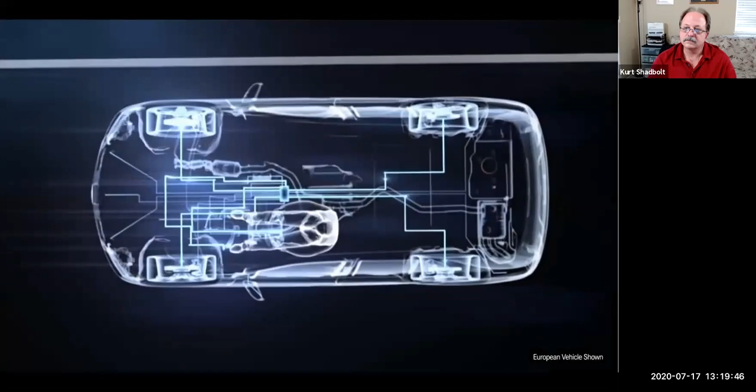During the first few minutes of driving, Attention Assist draws up an individual profile of the driver's driving style, which is then constantly compared with the latest feedback from the sensors. At the heart of the system is a highly sensitive sensor that records steering movements and steering speed.

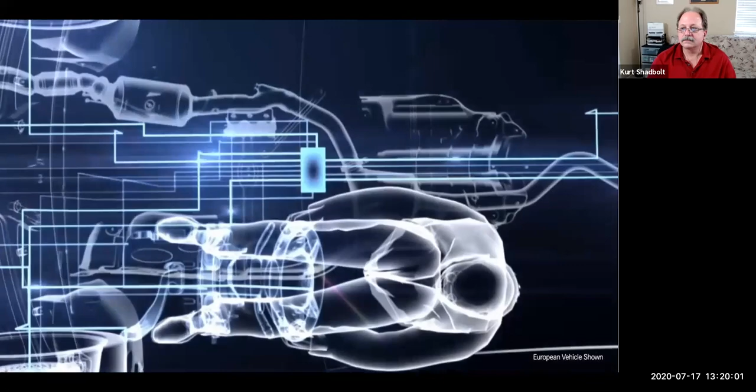Studies by Mercedes-Benz have revealed that drivers who are tired will keep making minor steering errors, which they then usually correct immediately. If the system detects this sort of behavior, it will go on to check further relevant parameters in order to verify the result.

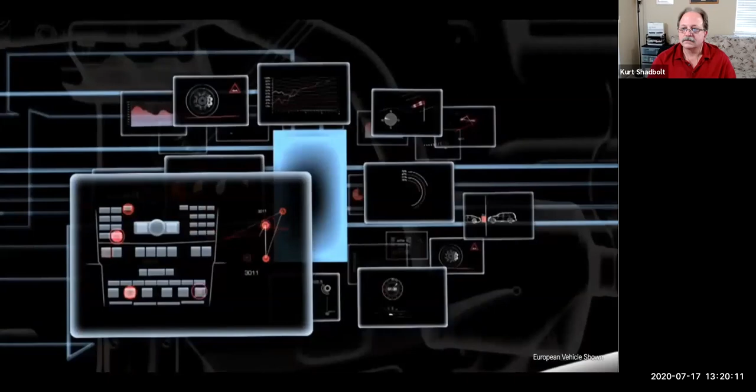For example, how long has the driver been at the wheel? Is the driver using the instruments and thus showing signs of activity? Are there external influences at work, such as side wind or an uneven road surface?

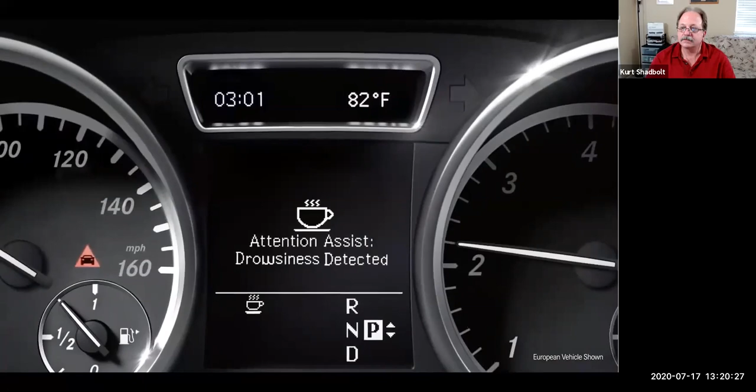If the result is unequivocal, Attention Assist will issue the audible and visible prompt, 'Time for a break.' Attention Assist from Mercedes-Benz helps prevent accidents caused by driver fatigue.

So that one's algorithm based, it's not using a camera. This next one's using a camera, and then we'll go into some questions that come up.

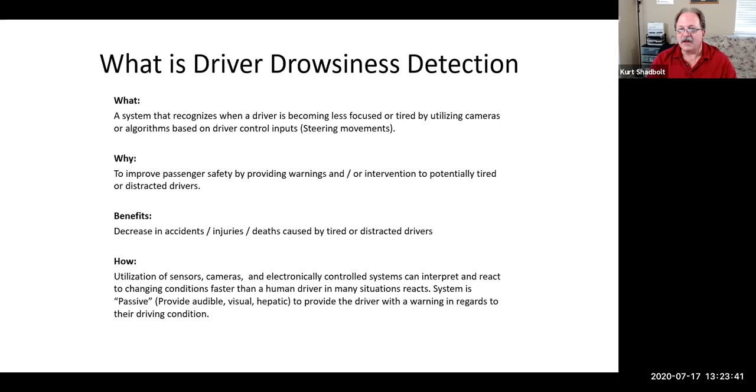And if you've got this system along with things like lane departure, the system becomes a little bit of an active system at that point, because now lane departure is going to kick in as you start to drift around. Or if you've got lane centering, it's going to help keep the vehicle straightened out a little bit. So there's some interesting aspects to this that have a lot of overlap with other systems.

So again, we're using a camera or algorithms. And one of the things that I thought of with the algorithm one, because it's very much looking at speed or at steering sensor input, so steering angle sensor is going to be a huge input with this.

What if you've got a shaky hand driver? Somebody that's got that vibration in their hands all the time, it's going to be looking at that static input all the time. Well, theoretically, if it's creating a template for those first few minutes when you're driving, thinking that you're more awake, it would see that normal input variation. And it's when you get tired that it would see an abnormal input variation.

These systems, when they first came out, they were notorious for the coffee cup instrumentation and identification. Hey, get a cup of coffee, pull over, relax, things like that. Typically it was an audible, not so much a haptic, but it could be.

But one of the things I started to wonder is, what if my driver's wearing sunglasses and it's a camera-based system? How is it going to function? What if they just wear regular clear glasses? Because we all know, and you can see it on my face right now, because of the way the lights hit the lenses, the way the computer screen hits the lenses, the reflection - so how closely is it looking at my eyes for blink rate and things like that?

What if I'm one of those drivers that you see that have the big green sun shield in front of their face?

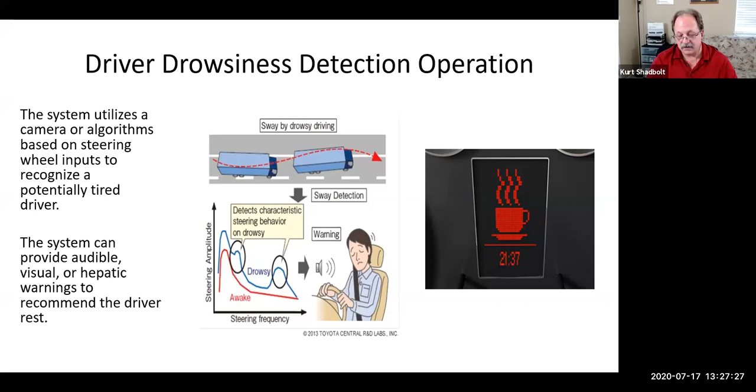Components in this thing, it can be a camera or it could be just module algorithm based. We're going to be looking at steering angle sensors primarily, but you may also have input from lateral accelerometers so that it can pick up gust and wind. The system could be looking at wheel speed sensors for variations if you were winding and driving through the road.

The cameras and stuff, a bunch of us went to San Jose about a year and a half ago, and went down to that technology center for a tour. And there was one of the companies that was there, and their whole focus was on facial imaging. And it was being used in automotive applications and airport security and all these different things. And they were using it for picking out threat potential things. Are you happy? Are you mad? Are you sad? Whatever. And it could pick those things up.

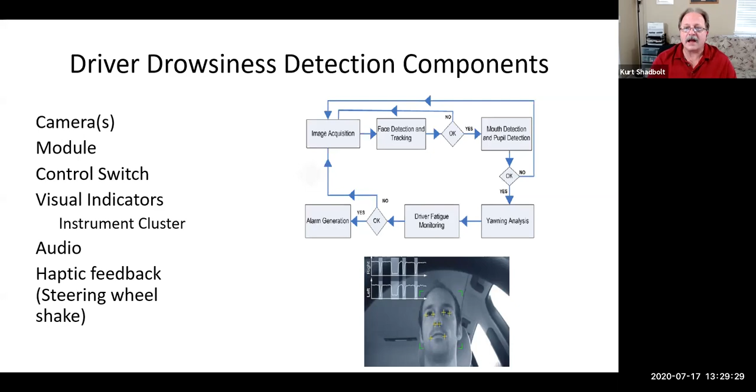Now, diagnosis, if it's a camera-based one, we've got to look for damage to the camera, and we might also take a look at customer-caused problems. Some people store their mail on the instrument cluster. I've got a guy around the street from me. His car, other than the driver's seat, is level to the glass. Back seat, front seat, dashboard. That's not going to work. Now the technician, what are you going to do? You're going to get in there.

You're going to take all that out, you're going to drive the car, and it's going to work fine. What's the customer going to do? They're going to stuff it all back in there. So you need to educate them on, hey, you got to leave that out of there.

Fault code chasing, our powers or grounds or signals. I got a diagram that's going to come up in one of these other ones to where it really reinforces exactly what I've been saying with those three things. Understanding, that's the biggest term I want to use today. The more they understand, the faster it will be, the better they'll be able to diagnose, and they'll also be able to make that decision of it's not broken, it's you, and re-educate the customer.

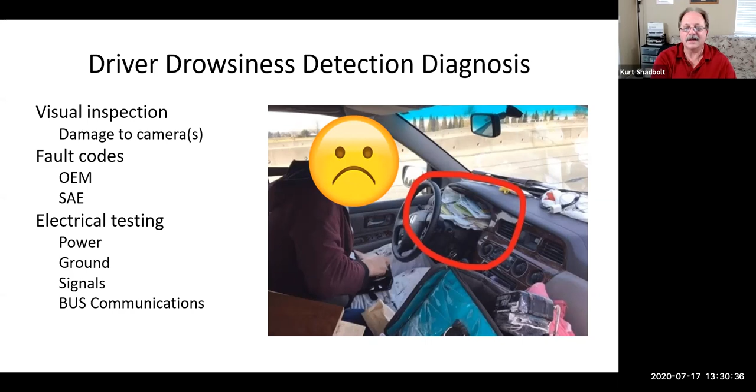You can see this is one of those camera-based installation locations. If you had a driver who drives with their hands at 12 o'clock, they're going to obscure that camera. These kind of things come into play. If you have customers, I think on that Subaru, because it looks like it's coming out from the navigation screen, maybe they put a phone holding clip in the vents near it, and now their phone's in the way. Or they got a bunch of stuff hanging down from the rear view mirror and it swings in front of it, their work badge, stuff like that. All of those different kinds of things could be an issue when it comes to diagnosis.

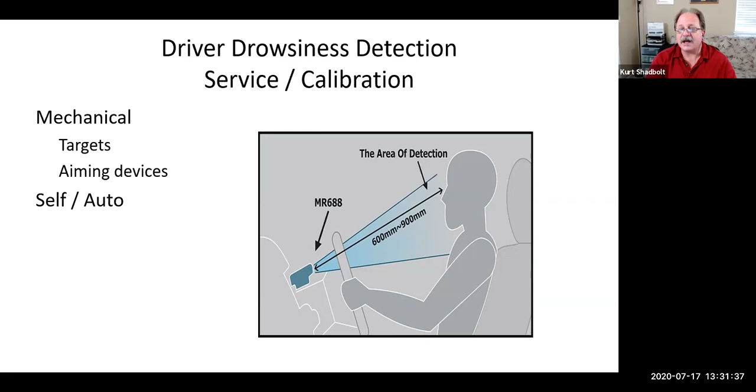The good thing is there's really not going to be a lot of calibration. The camera mount setups that I've seen, it's pretty much a fixed thing. It's mounted, there's no adjustability to it. I don't know on the Subaru if there's any capability within that, but it's possible. Otherwise, there's nothing special you got to do. It's kind of a use it and go type of system.

So let's see what we've got in here. This one's kind of a straightforward topic. Steve K says the system will monitor uneven road surfaces, then it'll monitor ride height to determine an uneven road. What it's looking at is a lot of different things. It's not so much looking at uneven road or ride heights and things like that. It's really looking at what are your normal inputs.

So when you first start driving, it assumes that you're awake and alert. And your steering inputs, typically when you're awake and alert, are going to be less. But if you're on a rough road or in a windy condition to where you're having to make corrections, your corrections are probably going to be kind of smooth and as necessary. But as you doze, you stop having those little corrections and they become jerk reactions, as you start to go, oh crap, and it becomes a different response rate. I'll use the term frequency. Your frequency changes based on the road conditions and atmospheric conditions.

Mike mentioned, does Subaru say you can't wear sunglasses in the owner's manual? I haven't looked, but I wouldn't be surprised if they did say the system may not work properly or correctly if you're wearing glasses and things like that. I know there's a couple schools that have Subaru in their program, so if you've got that and you're aware, throw it in there. But it's something I thought about this morning and just didn't get around to looking at.

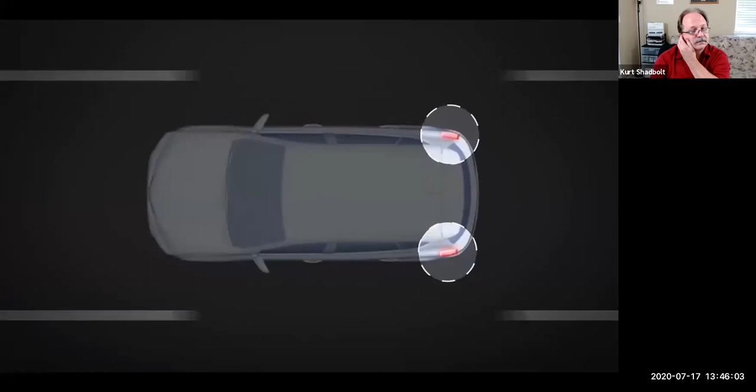The Rear Cross Traffic Alert function, or RCTA, available on select Toyota vehicles, warns drivers of oncoming cross traffic, helping them avoid unexpected collisions when backing up. RCTA is part of a safety system that also includes the blind spot monitor, both of which use the same radar sensors located inside the left and right sides of the rear bumper to detect vehicles within the monitored areas.

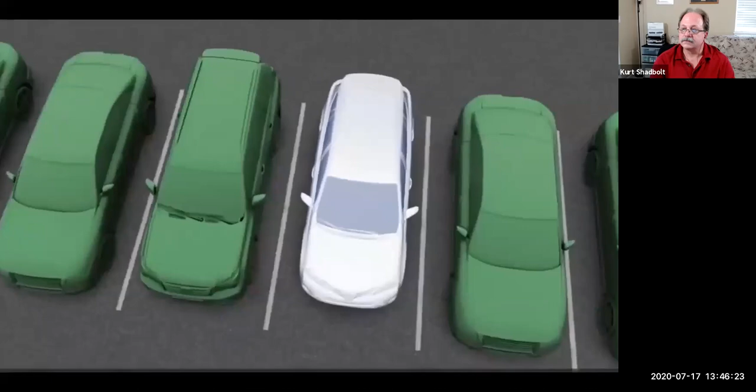Both features can be turned on or off using a common switch labeled BSM on the instrument panel. When turned on, the rear cross traffic alert function is operational when the vehicle is in reverse with a speed of less than approximately 8 kilometers per hour and a vehicle larger than a 125cc motorbike is approaching within the monitored area at a speed between approximately 8 and 28 kilometers per hour.

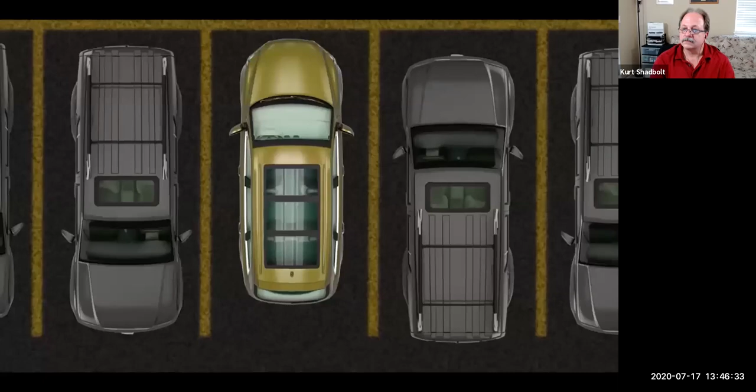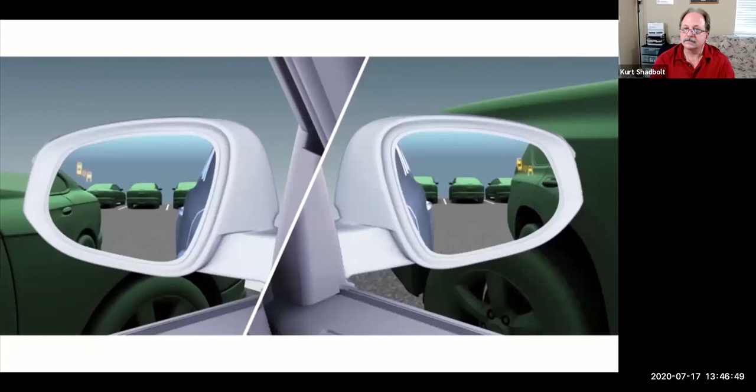The rear cross traffic alert function detects vehicles approaching laterally from the right rear or left rear of the vehicle and advises the driver accordingly if it judges that another vehicle may intersect with its own path. It does so by flashing the outside rear view mirror blind spot monitor indicator lights and simultaneously sounding a buzzer mounted in the rear cabin space. To give the driver more time to react, the buzzer can alert for faster moving vehicles from farther away.

The rear cross traffic alert function will not react to vehicles or objects that are stationary within the approach zone or to vehicles that are moving away. For the rear cross traffic alert function to operate normally, the sensors in the rear bumper must be kept clean and clear of any obstructions at all times.

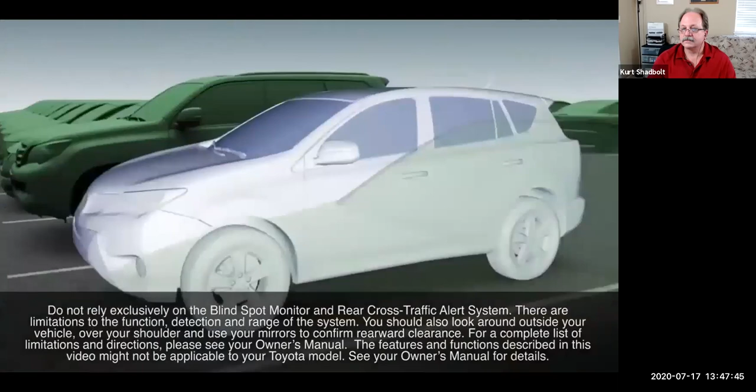The rear cross traffic alert function is only an assist and is not a replacement for careful driving. In some conditions, which include inclement weather, the size of the adjacent vehicle, and the speed at which that vehicle is approaching, the system may not function correctly. Therefore, the driver is solely responsible for safe driving at all times. The features and functions described in this video might not be applicable to your Toyota model. See your owner's manual for details. Thank you for watching this Know Your Toyota video.

Now, I don't know about you, but now that everything seems to be a truck, an SUV, a crossover, I drive a car a lot of the time, and I can't see when I back out of a parking space. So to me, this system is the greatest thing since sliced bread. I don't have it on any of my cars, but it has a huge purpose, you know, for that parking space, but also people's driveways and stuff.

So what sensors are we using? We're using those same radar sensors that we've used for blind spot detection. Those same radar sensors, and that's the big thing. And we've been kind of talking about this.

We can utilize these things for multiple aspects. We're paying attention to this when we put the car in reverse. Those sensors go active, you back up, it picks up, and then as soon as you drop it back into drive, those sensors go into standby, basically passive at that point until you have sufficient speed where now they're active for blind spot monitoring. So that same thing, just a different line of code.

Big benefit, accidents. How many times have you seen people racing through a parking lot and crash into a car backing out because the car backing out couldn't see them because they came flying up? More importantly, like you see on the TV commercials, the guy's backing out of his driveway and the little kid comes up on a little scooter or something like that. These things will directly impact accidents and injuries.

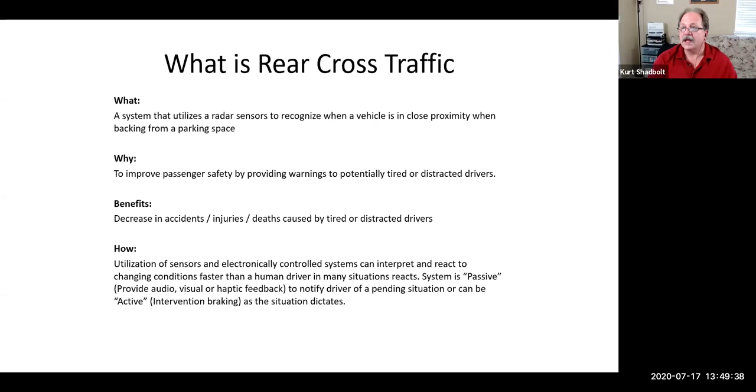So operation, it's those rear-facing radars. It's going to pick up moving objects within a certain size, space, window, and give an alert or possibly interaction if it's got an active capability.

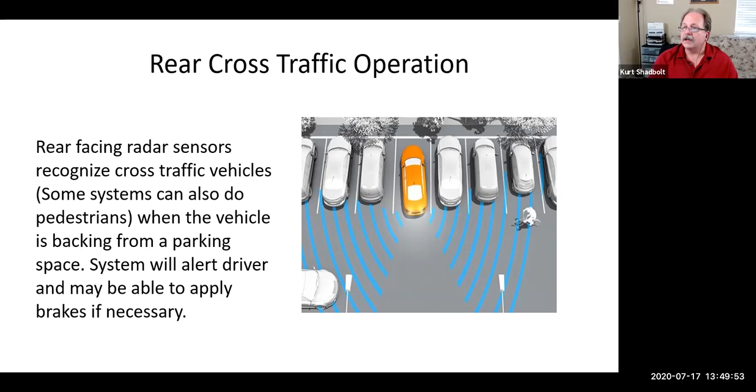Rear cross traffic components, the radar sensors—and where are they located? Well, it varies on cars, but a lot of the time they're on those rear quarter panels, say under the tail light or just to the front of them or just below them. They're right in that area where a corner collision, they're exposed.

And they are mounted—you can see on that picture, they're mounted to a bracket. Well, if this car has been in a collision and they don't get that rear body structure essentially perfect, even if they put a brand new bracket on there, it could be off millimeters or degrees, and that radar is no longer going to be viewing in the area it needs to view.

What if they had a bunch of body filler on that bumper cover? Instead of replacing it, they just filled it. Or they used an aftermarket cover that was thicker. All these kinds of things come into play because anything that obstructs that signal from penetrating that cover is like putting earmuffs on it. If it can't get its reflection correctly, it's not going to work correctly.

It may not have to stop it completely, because that would bounce it back and give me a fault code. But if it slowed it down enough, I might not get as quick a reaction as I could or should. And if we're a system that's an active system, hey, now we're talking with the brakes, so the ABS can apply, because even if your foot's not on it, I run those pumps, I run the solenoids, I got brakes. Again, just using things we've already got.

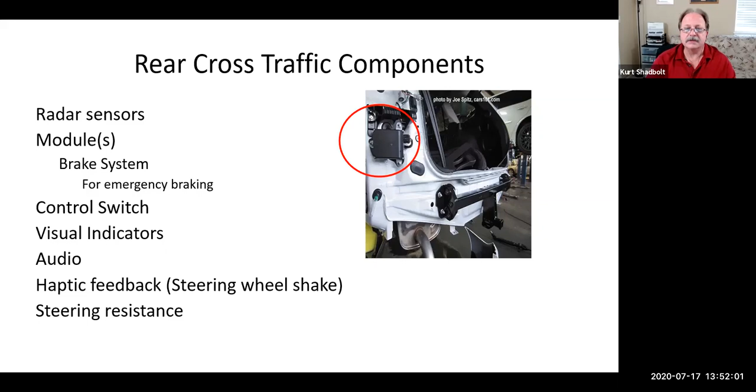Diagnosis—everything that we've been talking about, it starts with the visual. It really, truly starts with the visual. If there's signs of damage, if there's signs of previous repairs, looking into vehicle histories, all of that kind of stuff, you've got to dig into that because that could be the cause of the problem. Now, don't write it off and say that it is, because it might not be.

But then going through, looking at the fault codes—is there modifications? Because again, it's a radar sensor, it's got an expanding cone that's leaving it. If I lift the car, if I lower the car, that's going to change what it sees.

If I've got modifications back there, maybe bicycles on a bike rack on the back of my Subaru have the wheels hanging off, and the wheels interfere with that radar signal, it may be giving some false positives back. So there's a lot of things that could come into play that could give false positives or put the system into an off mode because it's seeing returns that it shouldn't be seeing based on an obstruction.

If I was looking at it, maybe the customer complaint is related to rear cross traffic, but I might have fault codes for blind spot detection, because those same systems are essentially using the same sensors. I might have a fault in one because of the nature of how that system monitors versus the other. So I might have a rear cross traffic complaint, but I'm diagnosing it through a test plan based around blind spot detection, since they're the same sensors.

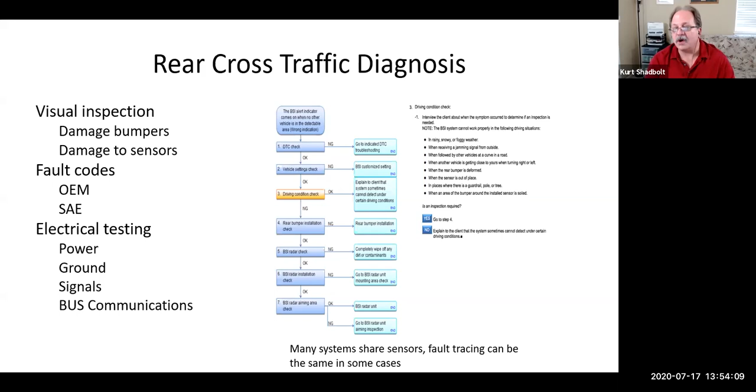And again, weather conditions all come into play. Is it covered with snow and ice? All those kinds of things. Is it a weird parking place where it's got a dip and a bump, those kind of weird spots you might get into? Those things could have an impact, so back to having a general awareness of what's going on with it.

Because it's a radar, it's got to be calibrated, so you're going to go through those calibration steps with the radar sensors. Thinking back to Josh in one of the earlier videos, I believe they were doing one of the rears. Essentially there's a target in a certain location that provides that radar a certain amount of bounce back, and as long as the system gets the bounce back it should, with everything located where it's supposed to be, the system's happy and it's calibrated.

Driving and self-auto calibrations might not be as plentiful with this, because you might not be in the right conditions for it to learn. But as we've discussed, a lot of newer systems have gone full circle - from mechanical to more automated, and now a lot of them are circling back to mechanical, because it's so difficult to get the vehicle in the right conditions during a road test to calibrate, that they've defaulted back to putting a target on it so they can be sure it calibrates correctly.

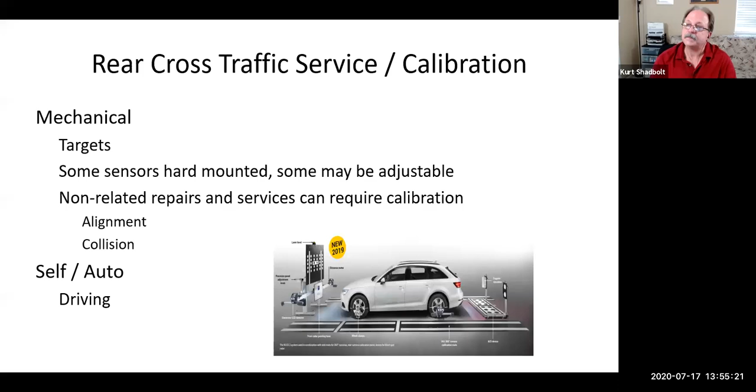And again, that was a pretty easy system. So let's see where we got here. Let's see here, scrolling my way back up.

Steve K saw a Chevy ad that will fill in the picture when a trailer is attached to the truck when in reverse mode. Any idea how that system works? Will it fill in the picture of the object closest to it? Actually, I do know how it works.

There's another camera - there's an accessory kit you buy, and you mount another camera at the back of your trailer. That hardwires in through the switch, the plug connectors, and it has to be a GM connector. You've got to activate the system in the programming and everything, and essentially it superimposes the camera picture from the back of the trailer instead of the camera picture from the back of the truck. That's also a key thing to keep in mind with a lot of these systems - if you've installed a factory trailer or trailer hitch assembly with factory wiring, that's the big piece: going through and getting the factory connection assembly and doing the programming. Because that's when it knows you plugged in a trailer, versus ignoring the rear park distance control.

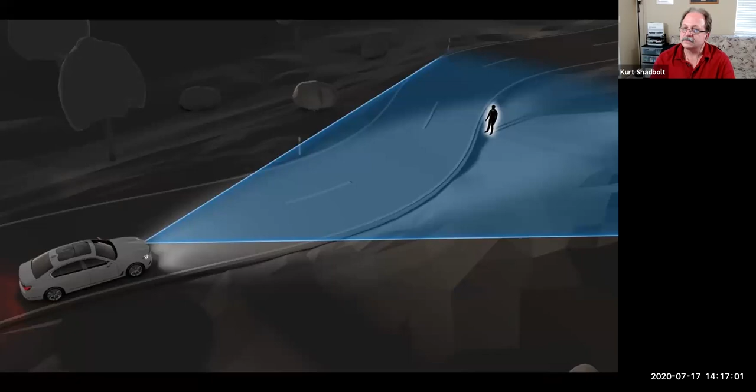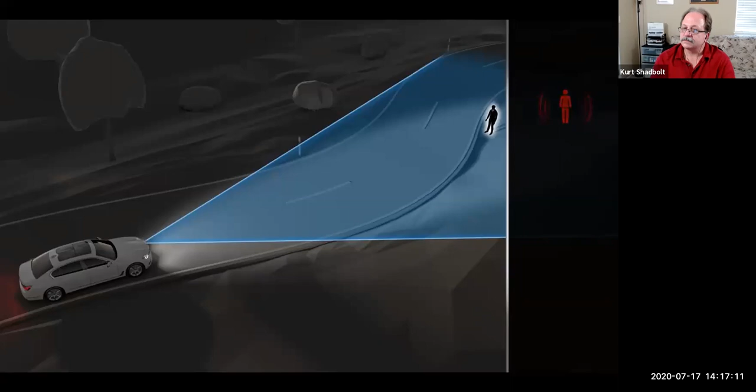The night vision system, providing human and animal recognition, warns against people or animals at night. To do this, a thermographic camera scans an area in front of the vehicle. People or animals from a certain size are correspondingly recognized by the system. As soon as a person or animal appears in the warning range, a warning is signaled. In case of an increased danger of collision, there is an acute warning with a warning signal. Additionally, a thermal image can be displayed in the control display.

So that's just a very quick one. I just saw Robin had chimed in. Robin probably has some collision background. He said, if you spray a steel coupon, a steel template piece, and maintain the same viscosity of paint on plastics using the same technique, you can establish a proper film build by measuring the coats on the coupon with the electronic thickness gauge. So that's a way where if I was measuring a plastic bumper, I could compare it with the metal on the car, if I'm a body shop really concerned about making sure I have the right thicknesses on there. So that's a good answer.

Thank you. So night vision - one of the big challenges we have is we're human and we don't see that great at night. And no matter how good our headlights are, whether lasers, LEDs, or xenon, the National Highway Traffic Safety Administration still says our headlights suck in most cases. So we can only see so far. Night vision is one of those things that takes that distance and almost doubles it quickly. It really creates a completely different environment. That's why I mentioned from an autonomous vehicle standpoint, night vision covers a gap that we have in systems.

Okay, and we can look at - who was it, wasn't Waymo, I can't remember which company it was that had that van about two years ago in Arizona that actually impacted a person crossing the street in the dark at night. The radar should have picked them up, but cameras don't see that great at night, they don't amplify light that well at night. And remember, the driver was looking down at their phone, not paying attention, though the driver might not have seen them either. It was a pitch black area and the person came out suddenly from the side. Night vision would have seen them hundreds of yards before that.

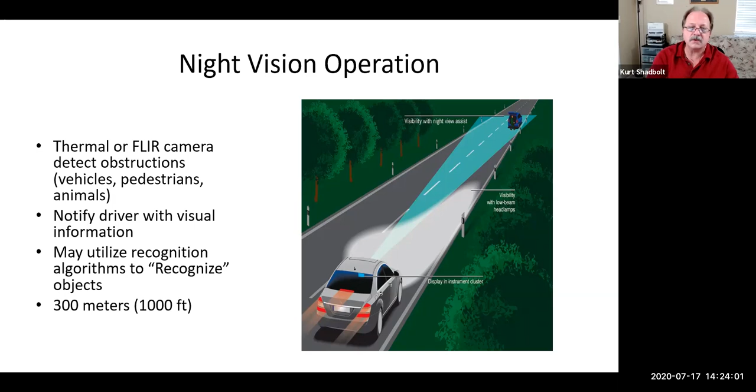Cars use thermal. The main component is a camera. It tends to be mounted in the center of the grille on a lot of these vehicles, fairly high up so it can see well. Again, they're not very large—the lens might be about 1 inch round, probably closer to 3/4 inch. The little box it's connected to is like a couple feet away, Zippo lighter sized, maybe a couple inches by an inch, and that's the box the camera is mounted to.

In most cases that camera is the module, similar to radar sensors and things like that—they're a module in itself. The diagram I'm going to show you in a second really drives that home.

Night vision is usually something you have to turn on. It's going to have some sort of display screen, whether in the center of the dash, displaying through the nav indication, or some manufacturers putting a third screen in the middle of the instrument cluster. You can see from the picture there, not only is it giving us the thermal image, but it's also superimposing a little red box around that person to draw more attention for the driver.

And when we were talking about adaptive lights earlier, we saw that one system that would spotlight. Well, that spotlight system was tied into the night vision—the night vision would pick up the person and connect with that spotlight system to highlight them with the spotlight.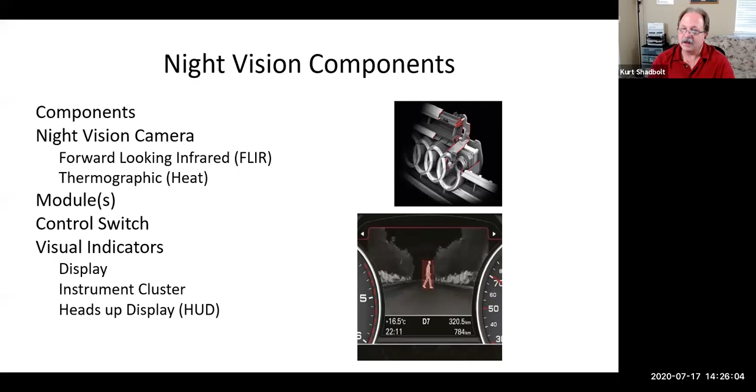So my electrical testing: do I have power to the module? Do I have ground to the module? And do I have my CAN bus communication? If I've got all that electrically, I'm good. Could I still have a hardware problem with the module or the camera? Yes. Could I have a software problem inside of it? Yes, but those usually are not a programmable module. So if it's bad internally, software or hardware, it's a new part.

There's your diagnosis. Now its results, the sensing it's making, it's transmitting that information over CAN. And it's going to whoever that system is directing it to, whether it's an instrument cluster or a master module that's controlling all the ADAS stuff, or maybe it's going straight to the display.

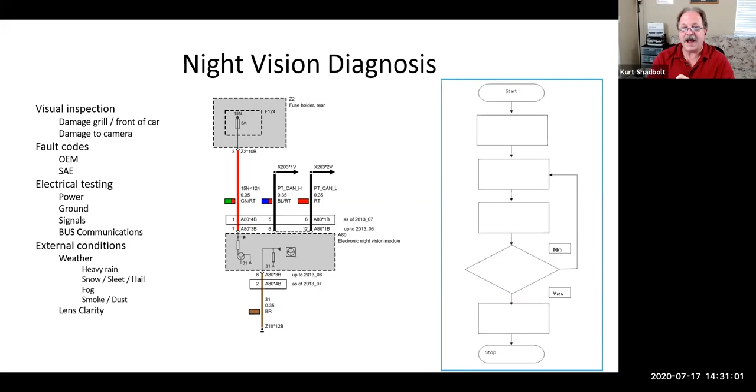If I've got really heavy rain, is night vision going to be seriously impacted? Not so much, because if that deer's out there, it's a lot warmer than the background. Same thing with sleet, snow, hail, fog, smoke, dust, everything else — it's a thermal image that I'm looking at. The challenge could be the clarity. It may be a little foggier between me and them if it's all impacted and built up with ice, but I'm still going to see a heat signature there that I wouldn't see with anything else. So it's a pretty robust system, but they are expensive. Everything I've seen option-wise, it's like a $5,000 or $6,000 option just to add night vision in a lot of cars.

Calibration on this is pretty straightforward. There are some ADAS calibration units that have a targeting setup for it. But with some of them, it's literally that headlight aimer like I showed last week — that's how you're setting up the camera, more with a headlight aimer. It's not so much about reflective targets or anything like that. It's kind of a spot point A target type of thing.

People are curious about sensitivities. Right now we're on about the 3rd or 4th generation of night vision. When we first saw night vision, back in 2002, 2003, we had a car parked in a stall with a power supply on it. We were teaching night vision.

You put a cup of boiling hot water in front of it, lukewarm and cold water, and wave your hand, and everybody goes ooh, ah. We saw this little lighted line that literally went right down the middle of the screen. We couldn't figure out what it was. Then all of a sudden somebody was at the front of the car and it went away. We're like, whoa, what did you do? All they did was turn off the power supply. What we were seeing was the temperature difference between the power cord for the power supply and the drywall it was laying in front of — it gave us that faint line. This was 2002, 2003. That's how sensitive these systems are.

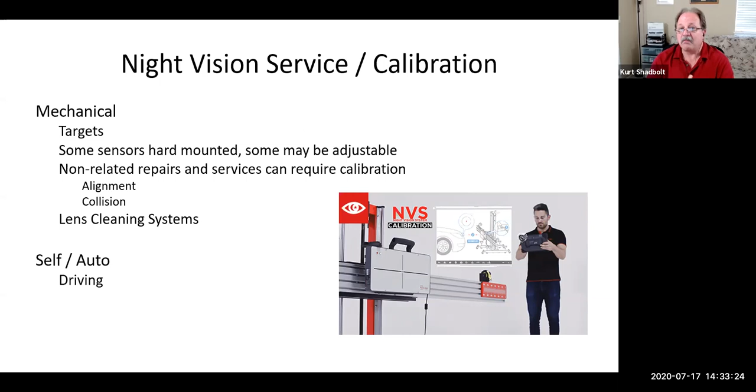In some of them you can replace lenses; oftentimes you're replacing the assembly. You might need to go through and carefully clean the lens. It does have a face surface that's very similar looking to an ultrasonic sensor — not that fisheye glass sensor lens, more of a muted, matte colored lens. So it's a little different. But for the most part, you're calibrating it like you do a headlight in many aspects.

So let's see what we got here.

Ed Snyder drove one of the 7 Series with night vision and found it would not pick up on the heat signature of butterflies crossing the road in farm country roads. Yeah, there's not a lot of heat in a butterfly. But if it was a duck or something, you would have seen it.

Edward asks, does it pick up exhaust pipes, or is that above the range? I'm trying to think back if I saw exhaust pipes — I don't remember noticing it, but I don't think there's a high end on it. Because like I said, we could see brake rotors on trucks glowing like the sun. And I'll bet those trucks coming down Grapevine were right there with exhaust temperatures too in some cases. So I don't think there's an upper threshold on it.

It may not show a different color after a certain point, but they're sensitive — it shows a lot. Like I said, you could see in a field if there was a rock that had been in the sun all day. It might be black all around it, and then you see this glowing rock because of the heat it held compared to the background around it.

Ed talked about the cup of water. Yeah, we used to do that. That was a regular thing, waving your hand in front of it, everybody in the car going, oh, that's cool. It is a neat thing.

Mark asked: did the manufacturer have you swap parts frequently? A lot of these systems, if you've got power, ground, and signal, you've only got two options: it's either hardware or software. In the case of the night vision cameras, they're not reprogrammable. You install it. If it was reprogrammable, the next step would be updating the software to see if that fixed it, and if it still didn't, now you're putting hardware on.